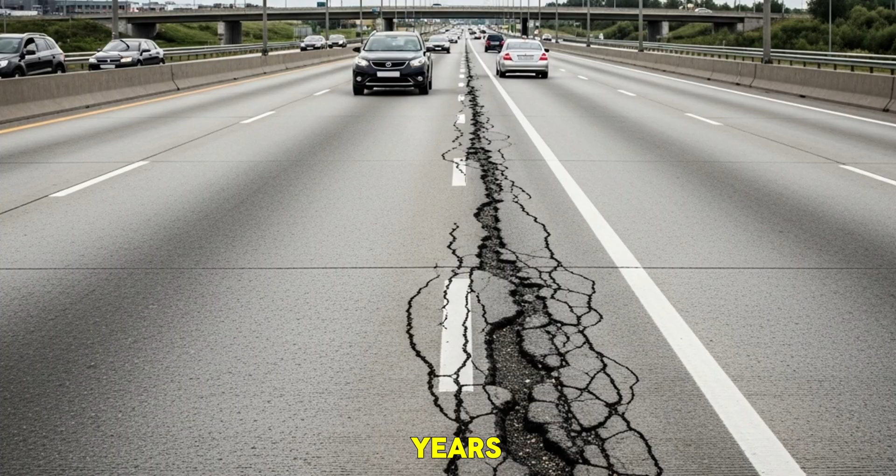Meanwhile, the concrete highway you drove on this morning has a life expectancy of 50 years, maybe 70 if we're lucky. It's already cracking, already scheduled for replacement. Built with modern technology and modern materials. So how does a medieval bridge outlast everything we build today by a factor of 10?

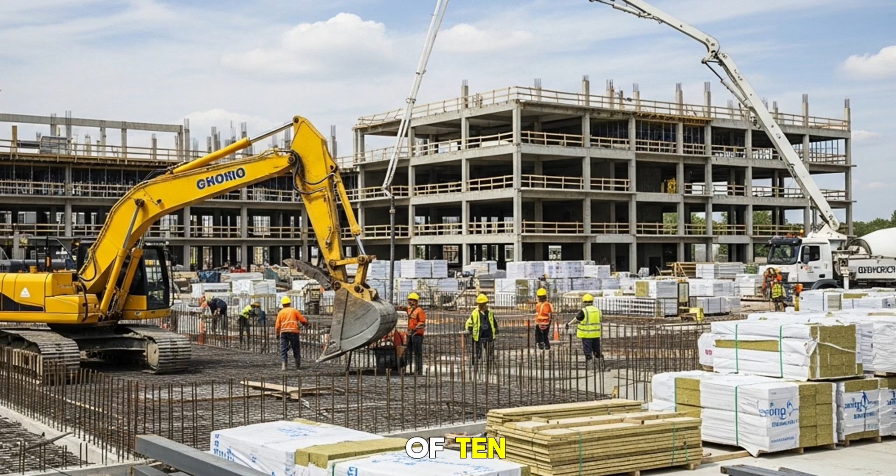The answer is a plant. One single species mixed into the mortar. A material 3 times stronger than modern concrete. Fireproof up to temperatures that melt steel. Earthquake resistant, water resistant, and it gets harder with age instead of weaker.

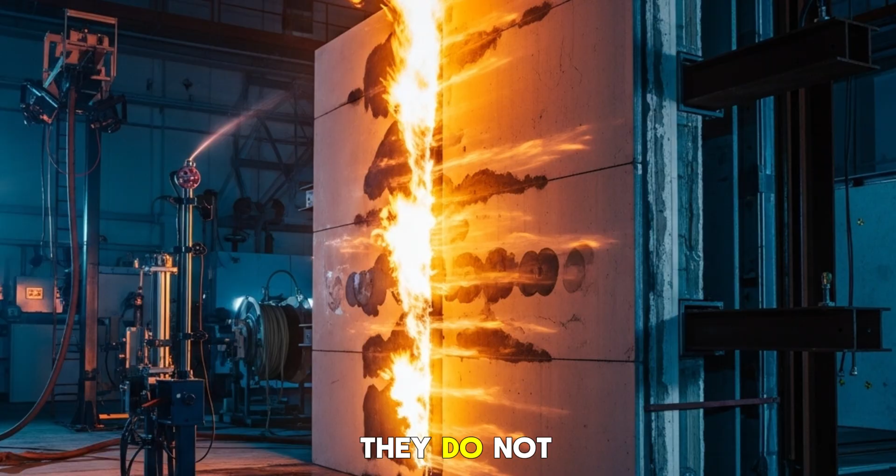And it is illegal to use in construction across most of the developed world. Not because it does not work, but because the $1 trillion concrete industry wrote the building codes, and they do not profit from bridges that last 600 years. This is hempcrete, the material they erased from history. Let me show you why.

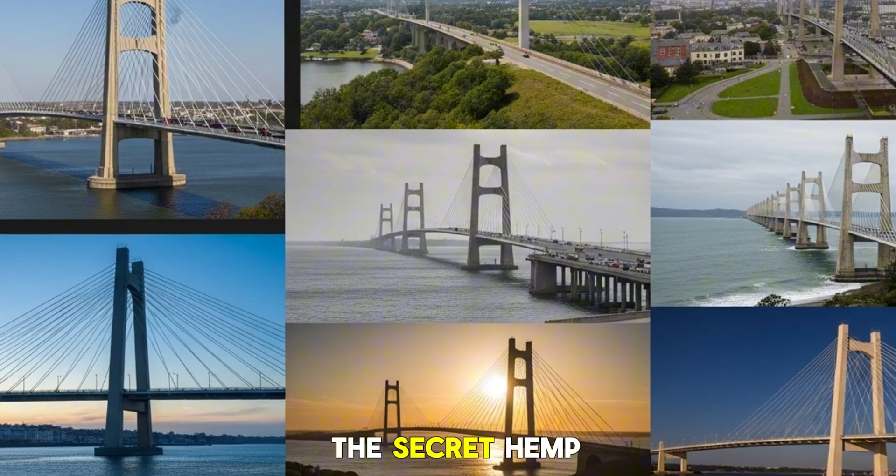Abbaye de Fontenay, Burgundy, built 1118, over 900 years old. The walls are solid, the structure is sound. Modern analysis found hemp lime mortar throughout. The material has petrified over centuries, becoming harder than the stone itself.

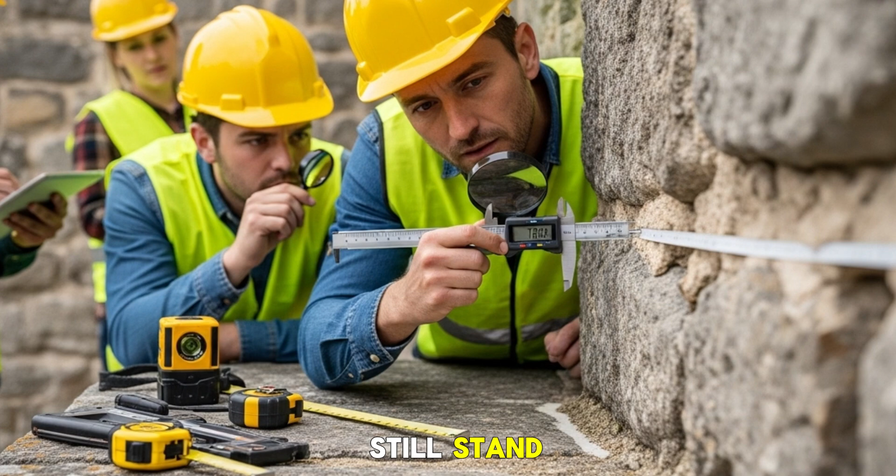Across Europe, hundreds of these structures still stand. Medieval bridges, castle walls, cathedral foundations, all built with hemp concrete, all outlasting modern buildings by centuries.

Now contrast that with America. The average concrete bridge in the United States lasts 50 to 75 years. Over 40% of all U.S. bridges are structurally deficient. The Federal Highway Administration estimates it would cost $125 billion just to repair the deficient bridges. Not buildings, not dams, just bridges.

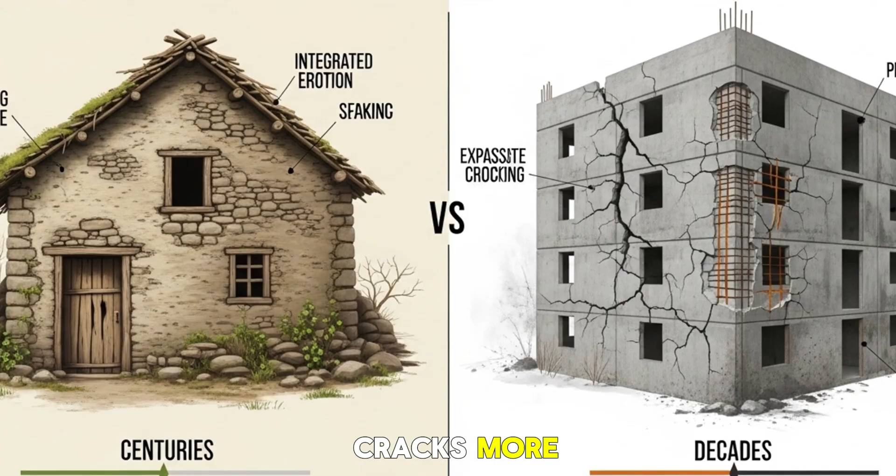Modern concrete cracks almost immediately after pouring. Water seeps in, freezes, expands. Cracks more, rebar rusts, expands, cracks more. The cycle continues until the structure fails. This is planned obsolescence. If concrete lasted 600 years, the construction industry would collapse.

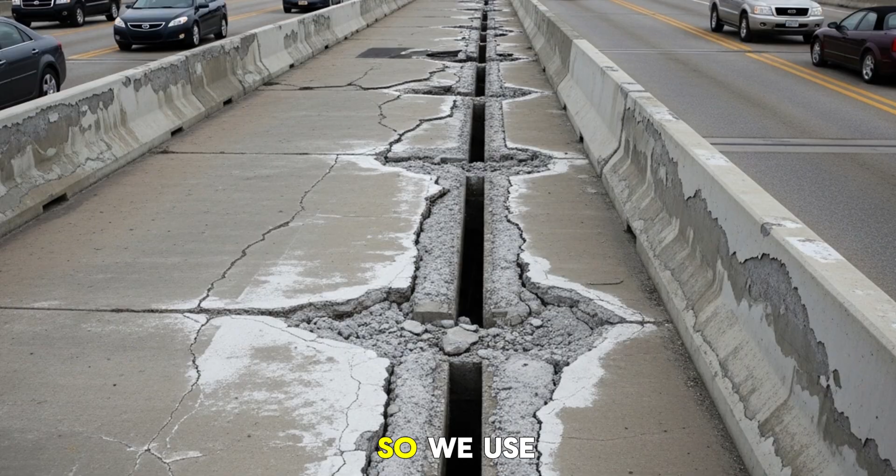No rebuilding, no replacing, no recurring revenue. So we use materials designed to break, on purpose. Hemp concrete does not break. Here's why: hemp is cannabis sativa, the same plant as marijuana, but bred for fiber, not drugs. It has been used for 10,000 years for rope, fabric, paper and building materials.

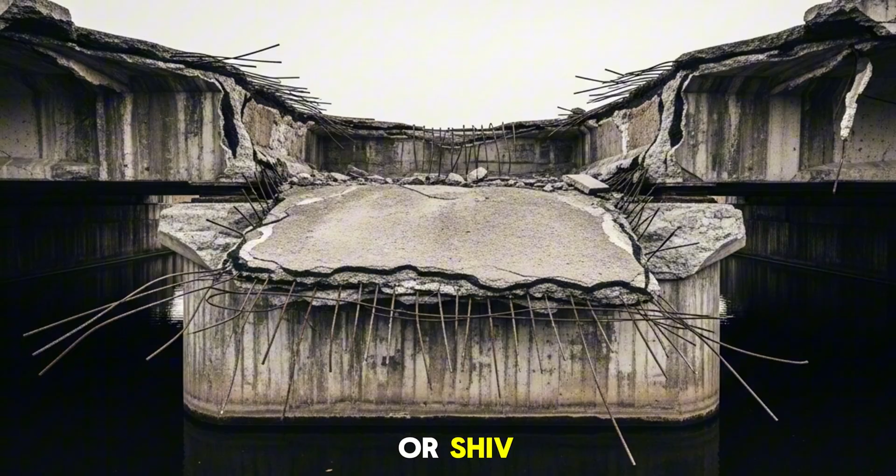When you harvest hemp, the woody core is called hurd or shiv. Chop it into pieces, mix it with lime binder and water, pack it into forms. As it cures, a chemical reaction happens between the lime and silica in the hemp. The lime absorbs carbon dioxide from air and hardens into limestone. The hemp fibers mineralize over time, turning stone-like. The final material is petrified hemp, locked in a limestone matrix.

The composite has properties modern materials cannot match. Hempcrete has tensile strength 3 times higher than standard concrete. Concrete is strong under compression but weak under tension, that's why you need steel rebar. Hempcrete does not need rebar because hemp fibers provide natural reinforcement throughout.

Hempcrete is fireproof, tested to over 1200 degrees Celsius. It does not burn, it does not release toxic fumes. Medieval castles built with it survived fires that burned for days. Wooden interiors destroyed, walls still standing.

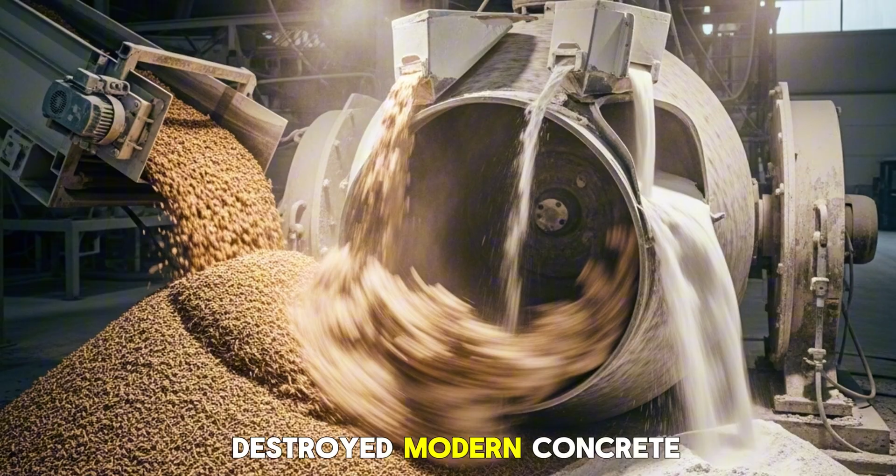Hempcrete is earthquake resistant, the material flexes. It absorbs seismic energy instead of shattering. Buildings made with it survived earthquakes that destroyed modern concrete structures right next to them. Hempcrete regulates humidity naturally, no mold, no mildew. Buildings require significantly less heating and cooling.

And here's the most remarkable part: hempcrete continues hardening over time. The petrification process continues for decades. A 300-year-old hempcrete wall is harder than the day it was built. Modern concrete does the opposite: maximum strength at 28 days, then slow degradation forever.

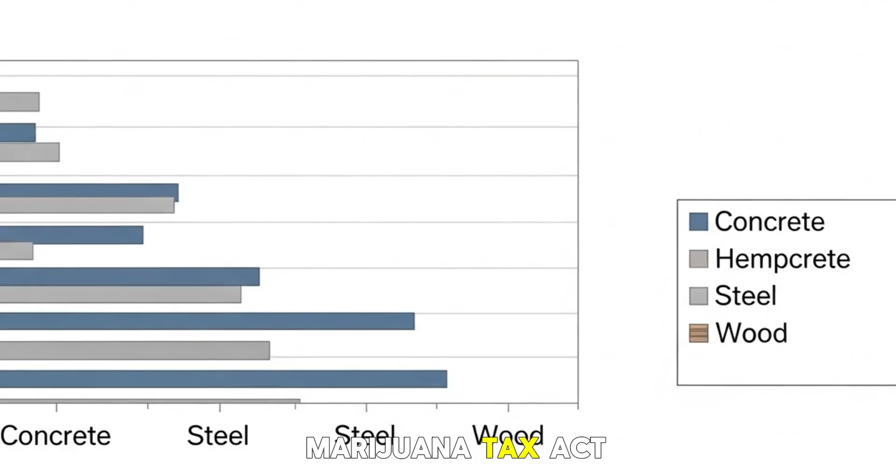So why did we stop using it? In 1937, the United States passed the Marihuana Tax Act. The spelling with an H was deliberate, a foreign-sounding word designed to associate the plant with Mexican immigrants during the Great Depression. The campaign was led by Harry Anslinger, first commissioner of the Federal Bureau of Narcotics.

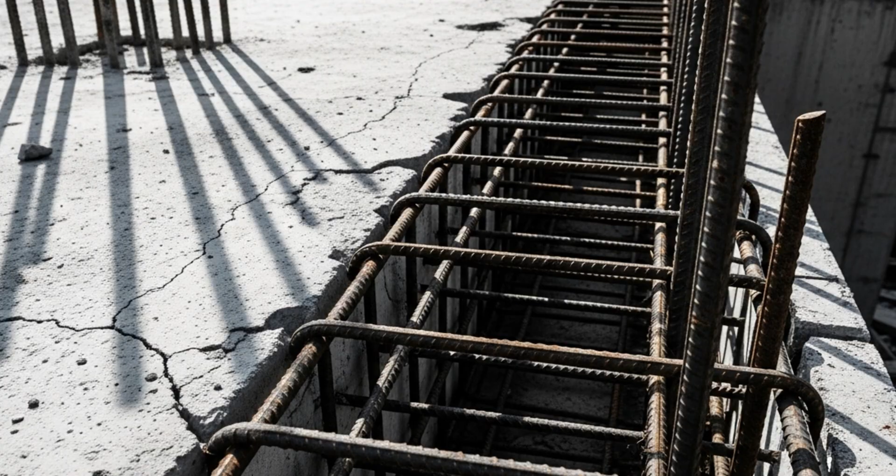It was funded by corporate interests that saw hemp as a competitive threat. William Randolph Hearst owned massive timber holdings. Hemp paper was cheaper and stronger than wood pulp paper. Hearst used his newspapers to publish racist propaganda claiming marijuana caused insanity and violence. Fabricated stories, zero science. But it worked.

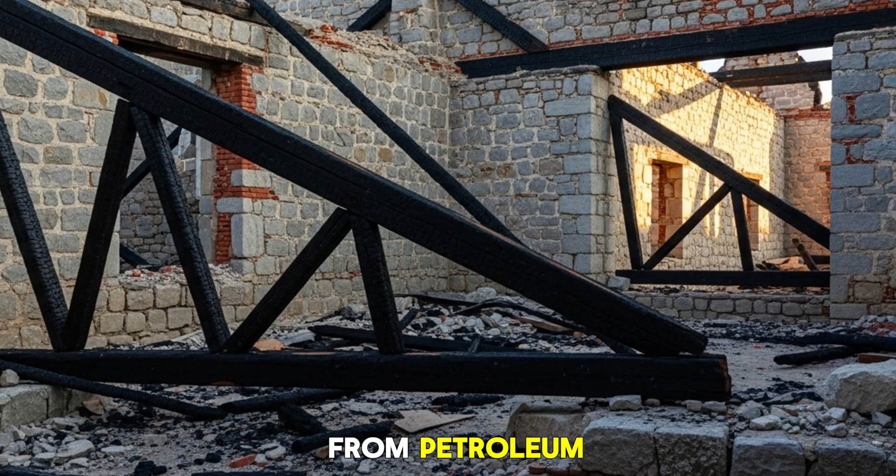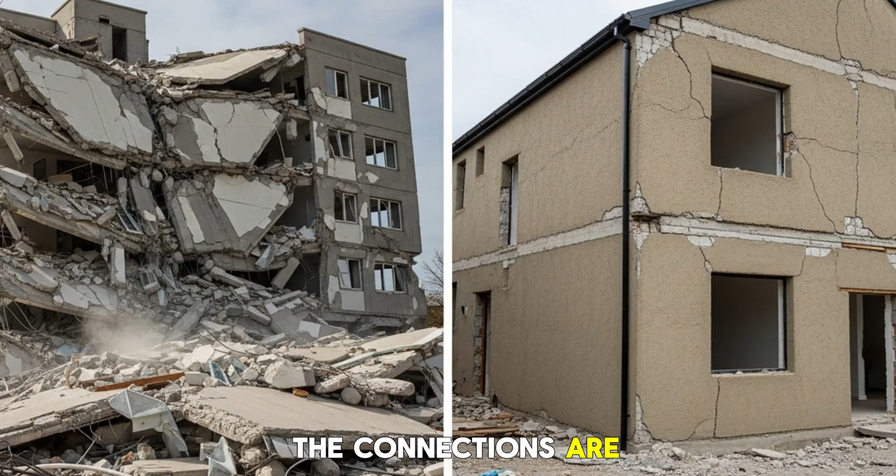DuPont Chemical Company had just patented a process for making plastics and synthetic fibers from petroleum. Hemp plastics and hemp fabric were direct competitors. DuPont's financial backer was Andrew Mellon, Secretary of the Treasury. Mellon appointed his future nephew-in-law, Harry Anslinger, to lead drug enforcement. The connections are documented, the financial incentives are clear.

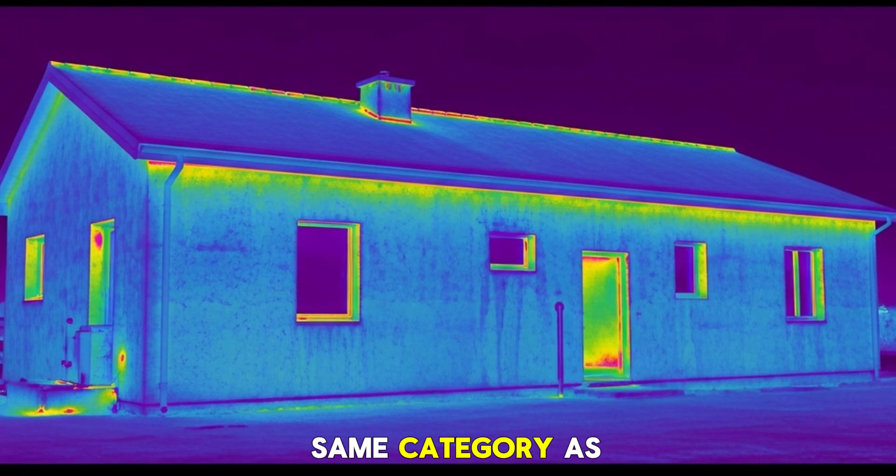By 1970, hemp cultivation was completely illegal in the United States under the Controlled Substances Act. Cannabis of any kind became Schedule I, same category as heroin. Farmers could not grow it, researchers could not study it, and the construction industry switched to Portland cement and steel. Both petroleum intensive, both degrade rapidly, both need replacement every few decades, both generate massive recurring revenue.

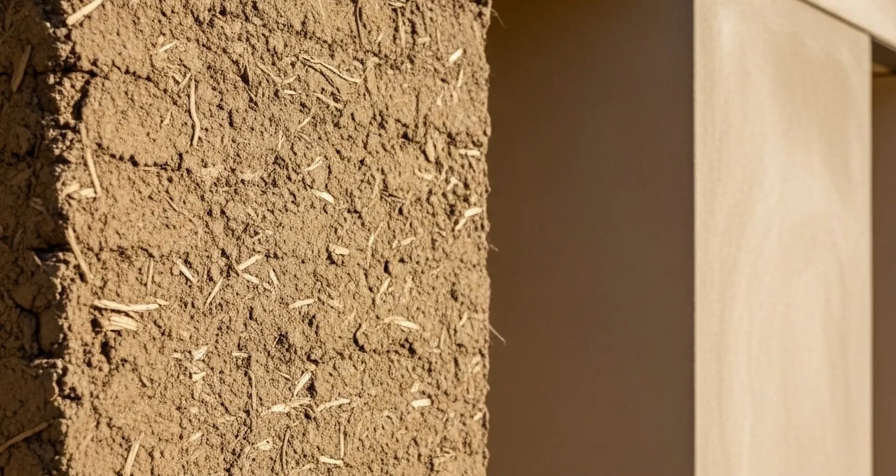Building codes around the world were updated throughout the 20th century. Standards written by industry groups dominated by concrete and steel manufacturers. And the new codes specified testing procedures that hemp materials could not meet.

Not because hemp did not perform, but because the tests were designed around petroleum-based materials. You cannot get hempcrete approved under modern building codes in most jurisdictions. The framework assumes materials degrade over time—hempcrete does not. The framework assumes you need vapor barriers—hempcrete breathes naturally. The framework assumes materials are inert—hempcrete is biologically active and continues changing for decades.

So even in countries where hemp cultivation is legal, using it for construction is nearly impossible. But not every country banned it, and what happened in those places proves everything.

France never fully criminalized industrial hemp. French farmers kept growing it for paper and textiles. French builders never stopped using hemp lime construction, especially in historical restorations. In the 1990s, French researchers deliberately revived hempcrete as a modern building material. They developed standardized mixtures, conducted scientific testing, built demonstration projects, pushed for building code changes. By 2012, France updated regulations to explicitly allow hempcrete construction—not experimental, fully approved with published technical standards.

The result? France now has over 20,000 hempcrete buildings: residential homes, schools, commercial buildings, multi-story apartments. It is mainstream. Builders are trained, suppliers exist nationwide. It is a normal construction option. And those buildings perform exactly as medieval structures predicted: superior insulation, zero mold, excellent air quality, extremely low energy costs, structural integrity that will last centuries.

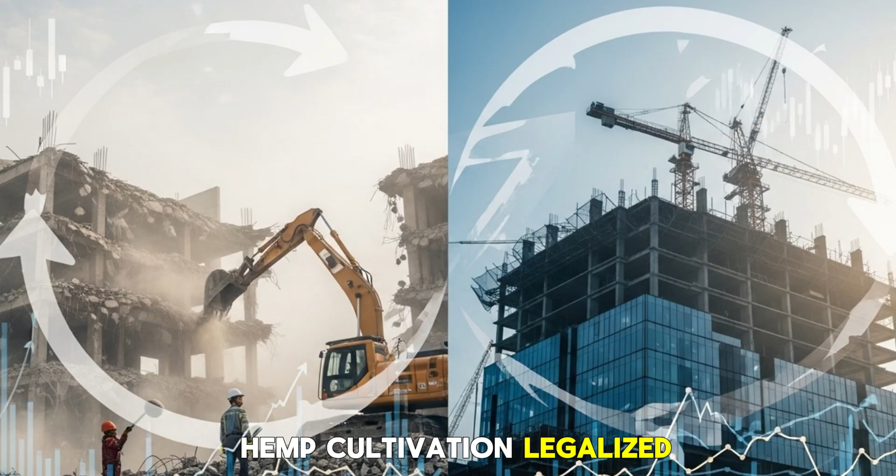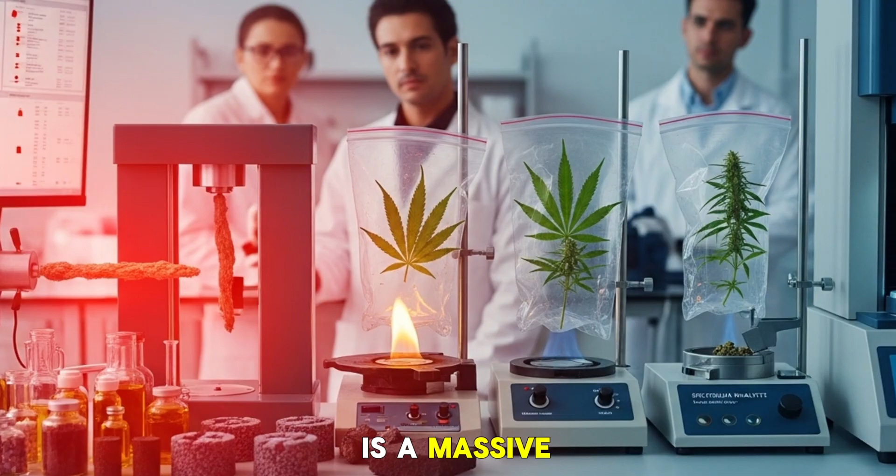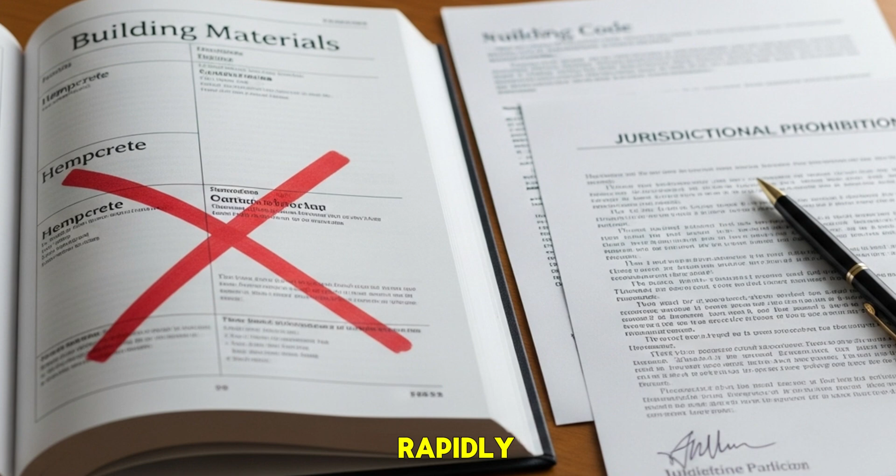The United Kingdom followed. Hemp cultivation legalized in 1993. Researchers at University of Bath studied it, architects designed with it, builders experimented. Today, the UK has thousands of hempcrete buildings. The Adnams Distribution Centre in Suffolk is a massive hempcrete warehouse, using 75% less energy than conventional warehouses and winning awards for sustainability. Ireland legalized industrial hemp in 2013. Hempcrete construction is growing rapidly there, and the Irish government funded research programs because they recognized the carbon reduction potential.

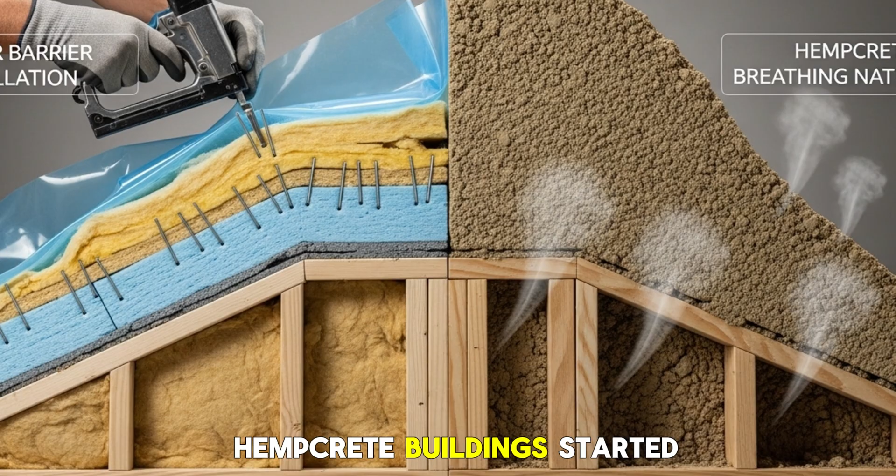Canada never criminalized hemp as aggressively as America. Industrial hemp has been legal since 1998. Hempcrete buildings started appearing in the early 2000s, with hundreds across Canada today, especially Quebec and British Columbia. Belgium, Netherlands, Switzerland, Germany, Italy—all have growing hempcrete industries, all updated codes or created pathways for alternative materials, all building structures that will outlast anything America built in 50 years.

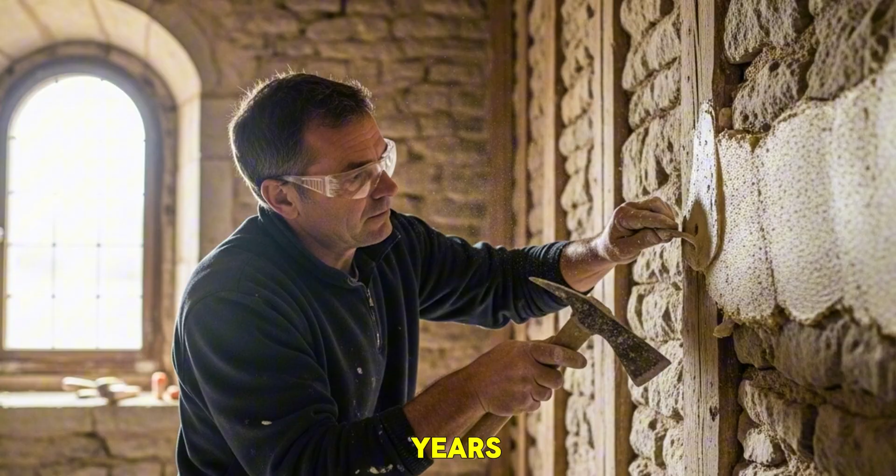And in every country, the same thing happens. Once builders and homeowners experience hempcrete, they do not go back. It works better, costs less over its lifetime, creates healthier environments, and does not need replacement in 50 years. But in the United States, it remains effectively illegal for load-bearing construction in most jurisdictions.

The 2018 Farm Bill federally legalized industrial hemp cultivation. Massive step forward. But legalized cultivation does not mean legalized construction. Building codes are controlled by the International Code Council. The ICC is heavily influenced by industries that profit from conventional materials, and those industries do not want hempcrete to succeed. Let me show you the numbers that explain everything.

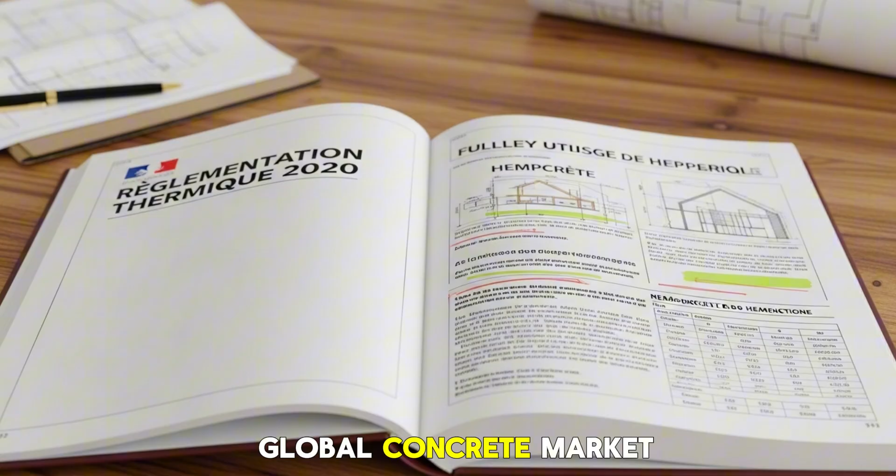Global concrete market: $600 billion per year. Global steel market: $900 billion per year. Combined, over $1.5 trillion in annual revenue. That revenue depends on one fact: those materials wear out. Concrete buildings need major repairs in 50 to 75 years. Steel structures need constant maintenance and eventual replacement.

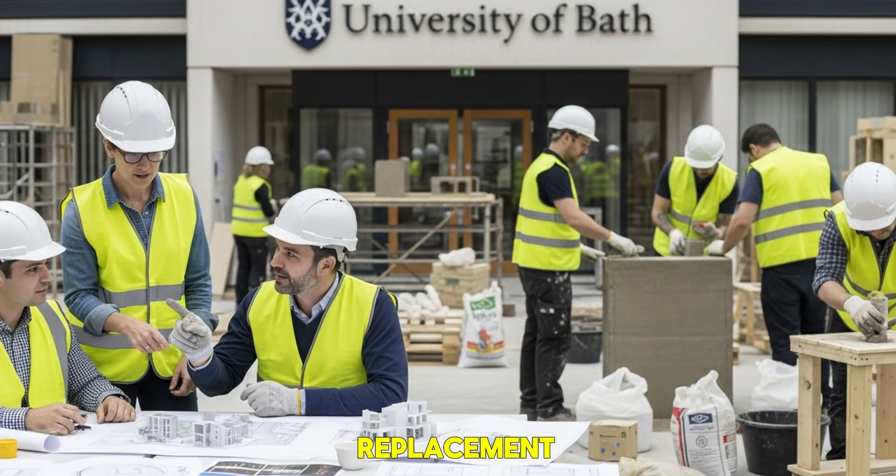This creates perpetual cycles of demolition and rebuilding. Every generation tears down what the previous built and starts over. That cycle employs millions, generates trillions in economic activity, feeds entire industries from extraction to manufacturing to construction to demolition to waste management. Now imagine a building material that lasts 600 years, needs almost no maintenance, does not require replacement—just sits there doing its job for centuries. What happens to the demolition industry? What happens to the replacement cycle? What happens to concrete manufacturers when nobody needs new concrete because old buildings still stand?

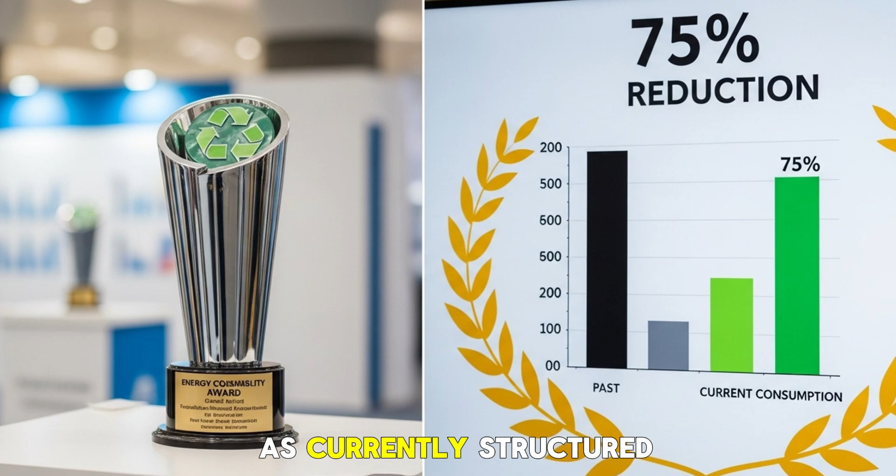The construction industry as currently structured cannot survive materials that last forever. The entire economic model collapses. That is exactly why hempcrete will never be promoted by people who control building codes. But here is what they did not account for.

The economics work for people who actually live in the buildings. A hempcrete home costs roughly the same to build as conventional, sometimes slightly more upfront, sometimes less depending on local materials and labor. Initial investment is comparable, but lifetime costs are not even close. Conventional homes require new roofs every 20 to 30 years, new siding every 20 to 40 years, HVAC replacement every 15 to 20 years, and continuous maintenance on windows, insulation, and moisture barriers. Over 50 years, total cost of ownership easily doubles the original construction cost.

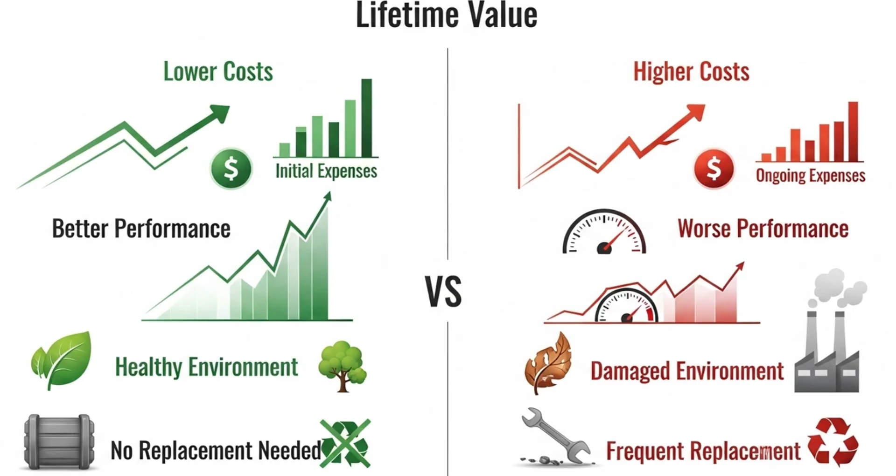Hempcrete homes require almost none of that. Walls do not degrade. The material regulates humidity naturally, so no moisture issues. Insulation is integral, so it never needs replacement. The structure does not shift or crack, so finishes last longer. Heating and cooling costs are 50 to 70% lower due to superior thermal performance.

A French study tracked total cost of ownership for hempcrete homes over 25 years, compared to conventional construction. Hempcrete homes had 60% lower energy costs and 80% lower maintenance costs. By year 15, hempcrete homes already saved more than any additional upfront cost. By year 25, hempcrete homes saved owners tens of thousands of euros, and hempcrete homes were still in perfect condition, while conventional homes showed significant wear, facing major renovation costs.

For individual homeowners, hempcrete is obvious: lower lifetime costs, better performance, healthier environment, higher resale value because the building outlasts mortgages by centuries. But for the construction industry, it is a nightmare. They do not make money on lifetime value. They make money on replacement cycles.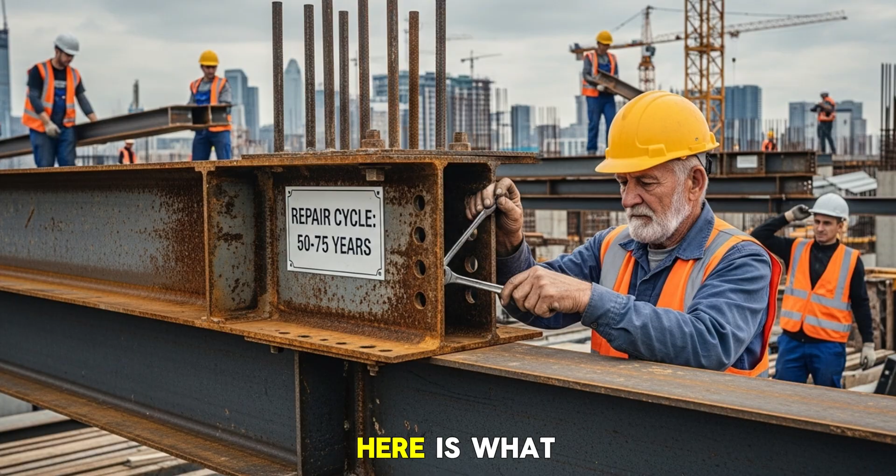Here is what makes this even more insane: the climate angle. The concrete industry produces 8% of global CO2 emissions. Eight percent—one of the single largest contributors to climate change on Earth.

Making Portland cement requires heating limestone to 1400 degrees Celsius in massive kilns fueled by coal or gas that releases enormous carbon, both from fuel and from chemical breakdown of limestone itself. Steel production accounts for another 7 to 9% of global emissions. Construction industry as a whole is responsible for nearly 40% of all carbon emissions worldwide.

And there's a building material that is carbon negative, stronger than concrete, fireproof, earthquake resistant, proven to last over 600 years. But you cannot use it because building codes written by the concrete and steel industry say so.

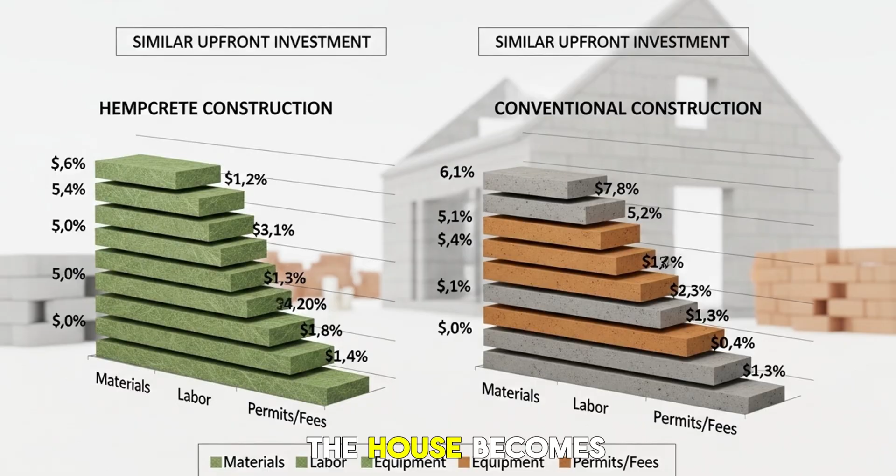Hemp absorbs CO2 during growth. One cubic meter of hempcrete sequesters approximately 110 kilograms of CO2. A typical single-family home built with hempcrete walls can sequester 15 to 20 tons of carbon dioxide. The house becomes a carbon sink, the opposite of conventional buildings which generate massive emissions during construction.

Hemp grows in 4 months, planted in spring, harvest late summer, reaches 15 to 20 feet in 120 days. No tree matches that. Unlike trees requiring decades to mature and heavy machinery to harvest, hemp is an annual crop processed with simple equipment. University of Bath conducted comprehensive testing on hempcrete compared to conventional materials.

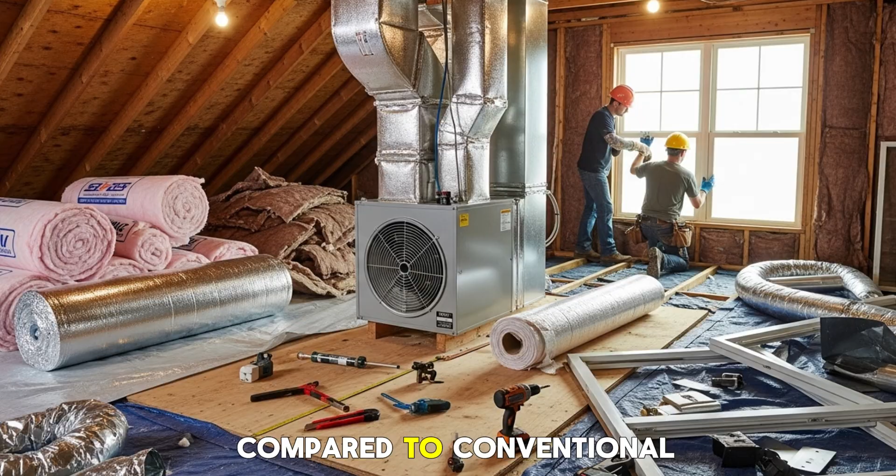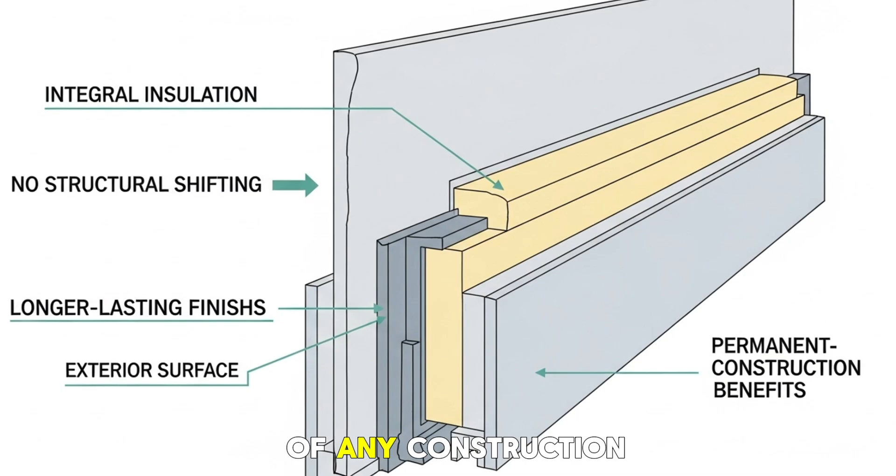They found hempcrete had superior thermal performance, better moisture management, and lower embodied energy than standard insulated wall systems. Embodied energy is the total energy required to produce a material from extraction through manufacturing to installation. Hempcrete has one of the lowest embodied energy values of any construction material on Earth - lower than concrete, lower than steel, lower than brick, lower than industrial lumber.

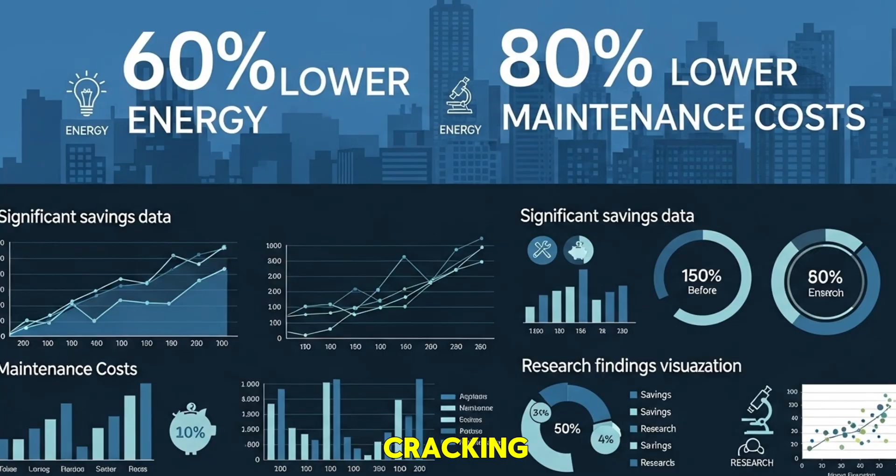The French National Institute of Applied Sciences tested hempcrete for seismic performance, built wall sections, and subjected them to simulated earthquake forces. Hempcrete walls absorbed energy and flexed without cracking. Conventional concrete walls under the same stress developed fractures and structural damage.

Fire testing by multiple European labs confirmed hempcrete is classified as non-combustible, meeting or exceeding the fire resistance of concrete and brick. Structures built with hempcrete survived real fires that burned neighboring buildings to the ground.

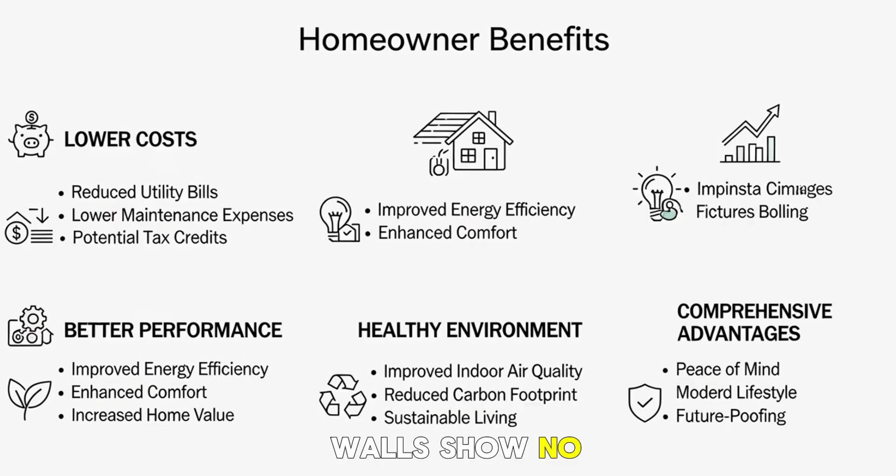A long-term study in France has been monitoring hempcrete buildings since the 1990s. After 30 years, the walls show no degradation. The material continued hardening through carbonation. Thermal performance remained constant, and the buildings require almost no maintenance.

Compare that to modern construction. The average American home requires significant maintenance or renovation every 15 to 20 years. Roofs replaced, siding replaced, insulation degrades, moisture barriers fail. Conventional buildings are designed to fall apart so you keep spending.

Hempcrete buildings do not fall apart. They get stronger, and that terrifies the industry. Medieval bridges built with hemp are still standing after 600 years. Modern concrete highways are crumbling after 50.

The science is published. The buildings exist. The performance data is undeniable. Yet the material remains illegal or heavily restricted in most of the developed world. This is not about whether hempcrete works - it works. Not about safety - it is fireproof and earthquake resistant. Not about affordability - lifetime costs are lower than conventional construction.

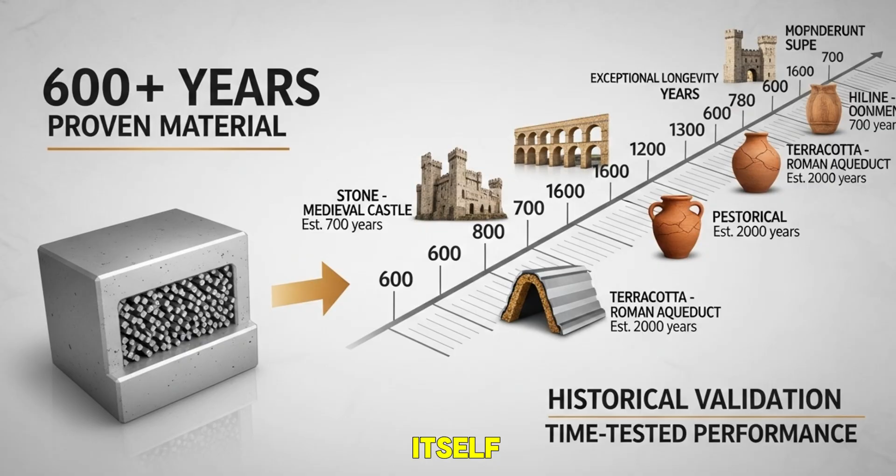This is about an industry protecting itself, an industry worth over $1 trillion per year, an industry depending on materials failing so they can sell replacements, an industry that wrote the building codes and controls standards and makes sure alternatives never get approved.

But cracks in that system are showing. Every concrete bridge that fails, every building condemned after 50 years, every climate report showing construction produces 40% of global emissions - every failure makes it harder to justify why we're not using materials that work better.

France has 20,000 hempcrete buildings. The UK has thousands. Canada is building more every year. These are not experiments - these are homes, schools, businesses, real buildings occupied by real people who sleep better, breathe cleaner air, pay lower energy bills, and live in structures that will stand when their great-grandchildren are old.

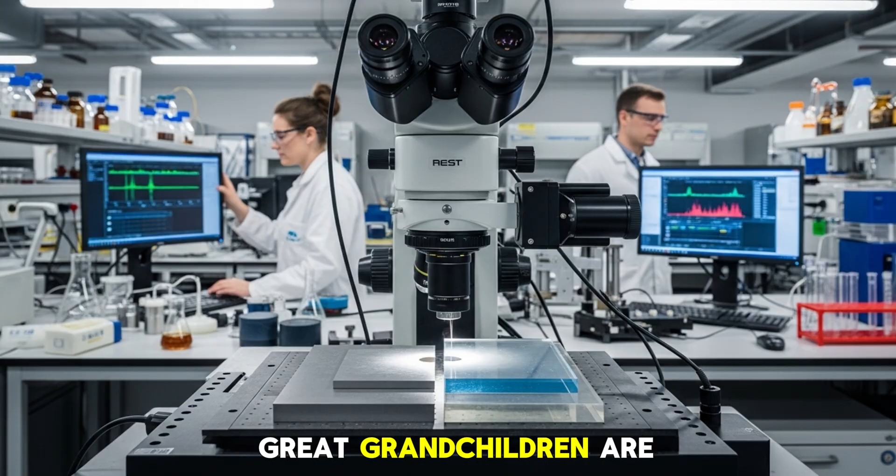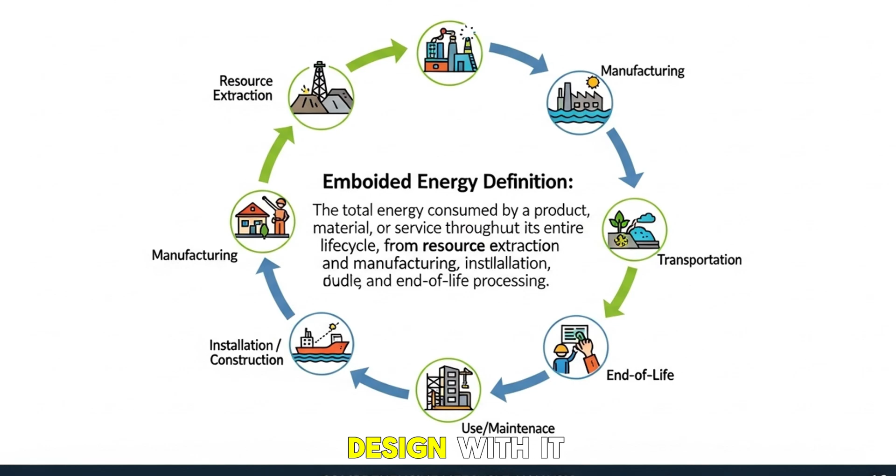The United States legalized hemp cultivation in 2018. That door is open. What comes next is building codes, and codes change when enough people demand it, when enough builders push, when enough architects design with it, when enough homeowners learn there is an option better than materials they have been sold their entire lives.

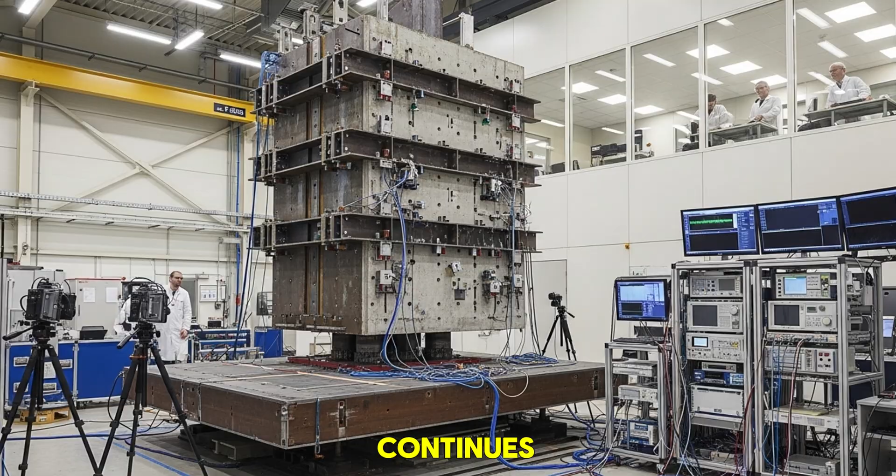Hemp grows in 4 months. One acre produces enough material to build a small house. The plant absorbs carbon while growing. The material continues absorbing carbon for decades after construction. A hemp building is carbon negative from day one.

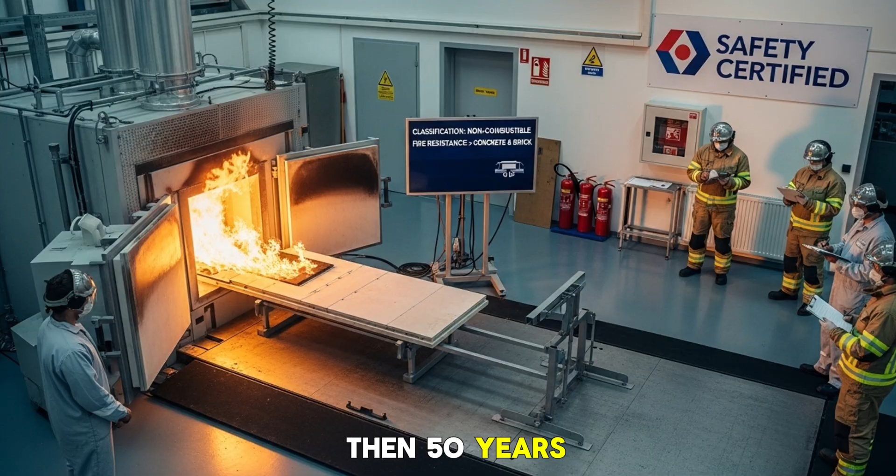Compare that to a concrete building - massive emissions from cement production, steel production, transportation, construction. Then, 50 years later, tear it down and do it again, generating another round of emissions, forever.

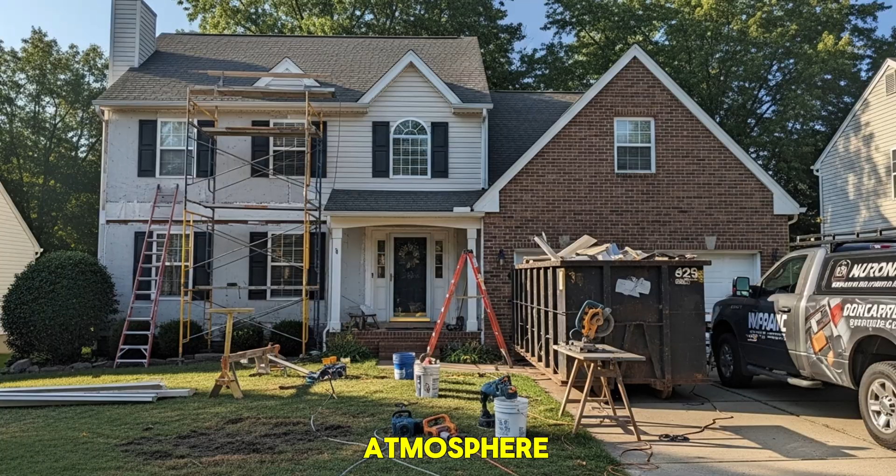We are living in a world where the climate is changing, resources becoming scarce, economic instability increasing, and we are building structures designed to fail and be replaced every 50 years, using materials generating 8% of global carbon emissions, when we could be building structures lasting 600 years, using material that removes carbon from the atmosphere, material that grows in 4 months, material tested by time and proven by science.

But you cannot use it because the people who wrote building codes profit from materials that fail - unless enough people learn the truth, unless enough people start asking why medieval bridges outlast modern highways, unless enough people demand access to materials that actually work. The bridges are still standing, been standing 600 years. Will stand 600 more. They are proof we already knew how to build things that last.

We just chose to forget, because forgetting was profitable. Maybe it is time to remember.